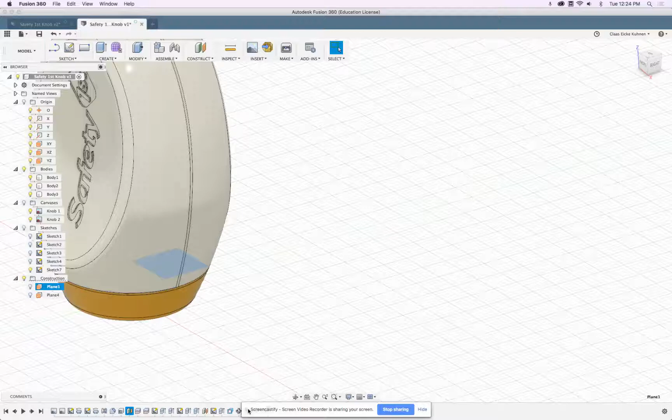Let's revisit the way we designed our individual parts. What I'd like to improve on this design is, while it's very good for quickly 3D printing and prototyping, and these parts do nicely interact with each other, I'd like to have a system where the two white parts can be better snapped together and the yellow part doesn't pop out.

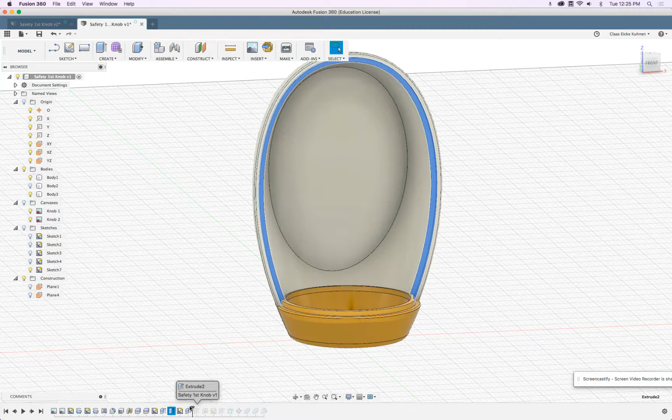So I would have to go back to kind of like the space. So, like there, this is good, that's fine. But what we did here, adding this lip and then cutting this part into it, I really do not want anymore. So I can delete this.

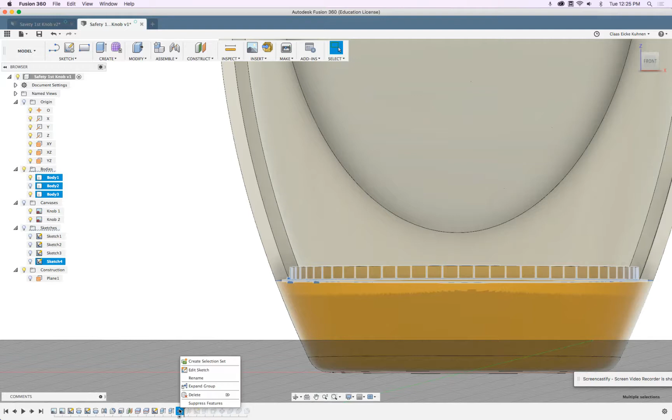Or I could, for example, group this into a group, and then suppress this group. Suppress means the functions aren't really active currently, and the rest of the design here should more or less continue being executed, as you can see. Good, so we go back to here.

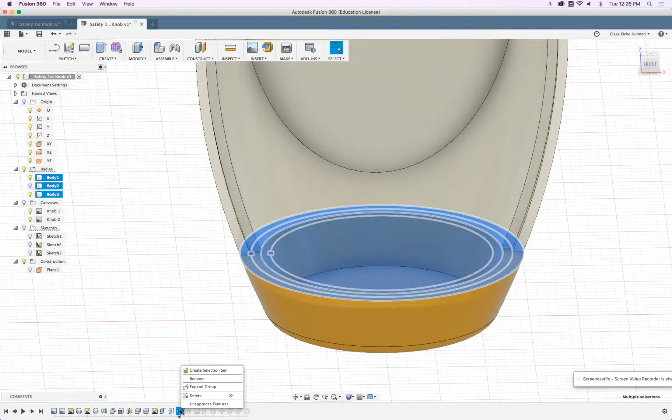Because I'm going to completely rebuild this, I will also simply delete this, and then delete the group and expand. No, I don't want to delete the group and the content. Very good.

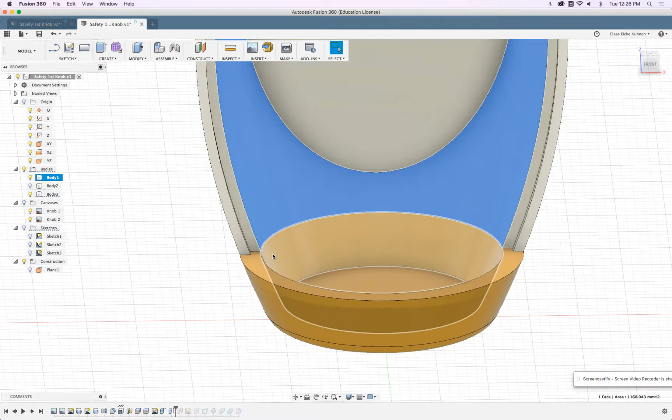So, essentially on the surface there, I need to have something that sits inside and functions kind of like a block. So how can we do this? This is actually pretty simple.

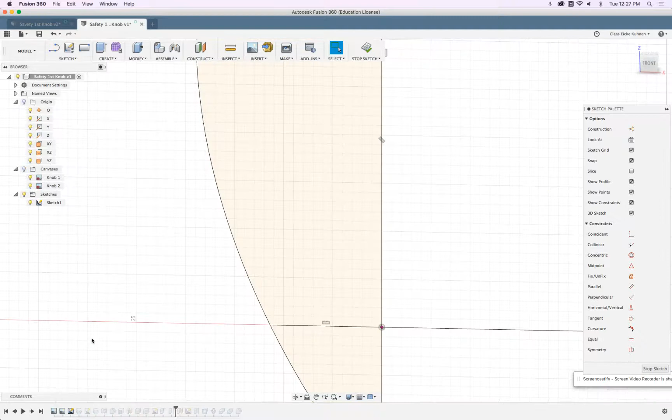So we did an offset of 2 millimeters, keep that in mind. I can, for example, go back here to my sketch, the first one, press O, and say offset 2 millimeters. Click stop. Let's show that sketch, and there you see that's plus minus where it is.

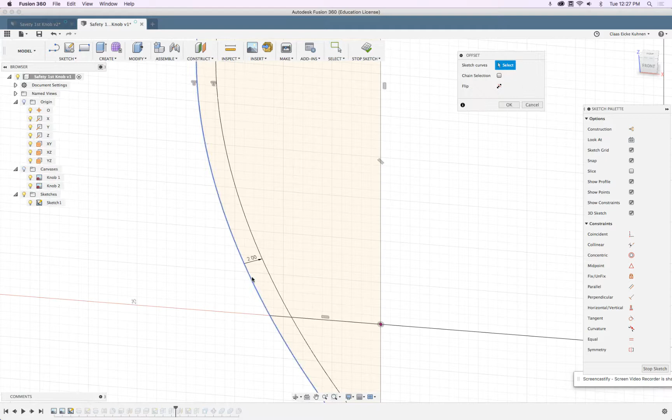Very good. So let's go back to that initial sketch. We do another offset, let's say 4 millimeters. And then here I will draw a horizontal line, and that line should be set to be horizontally constrained.

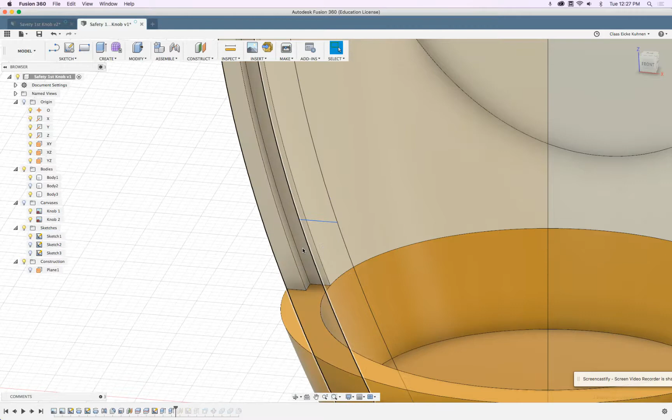Okay, very nice. Can we slide this one down? I just dragged it down, or with the M key. Yeah, sometimes it works, so I might have to redraw it by hand. The reason why I did this is I have now this profile. I'll turn all this off there.

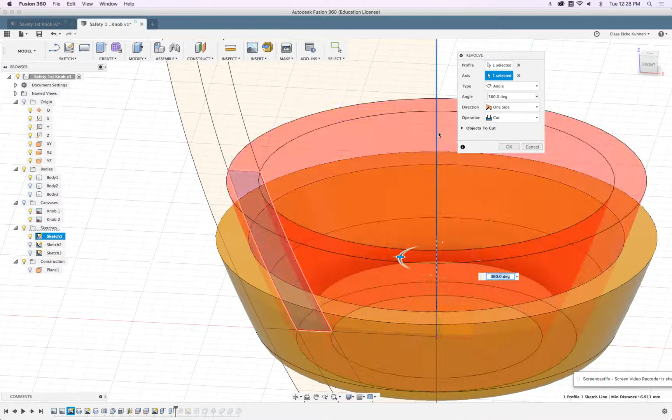Very nice. That profile, I do another revolve. So that profile along this axis, not cut, but join please. There, and see that's still hollow. But I have now kind of like this angle, and my sides perfectly fit over it, so the yellow part can't snap out anymore.

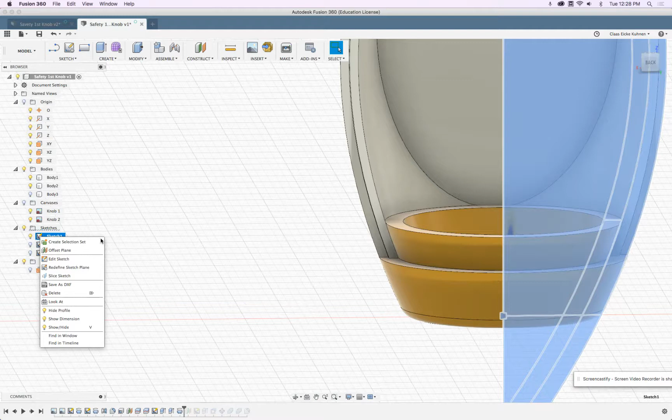Now for 3D printing, we don't want to waste too much material. So our question is, can we maybe bring this down a little bit? Yeah, that seems okay. What's the distance from here to there? 2 millimeters. Yeah, so we'll be fine.

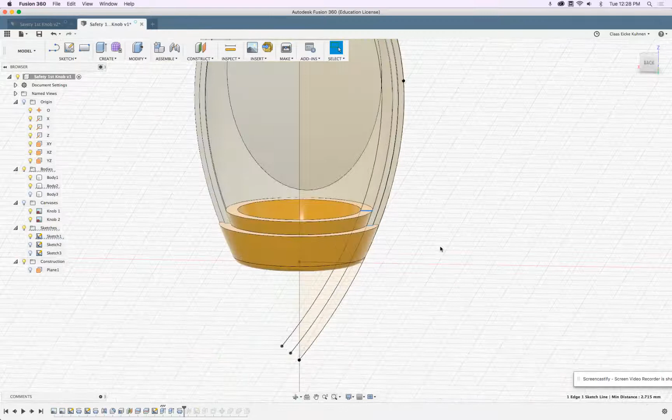Very good, okay, so that solved problem 1. Problem 2, I would like to have a better key here. So a key we can very easily build either out of a circular or a rectangular cross section. It's kind of like 2 tubes that meet each other, but one tube has a pin that goes into the other tube.

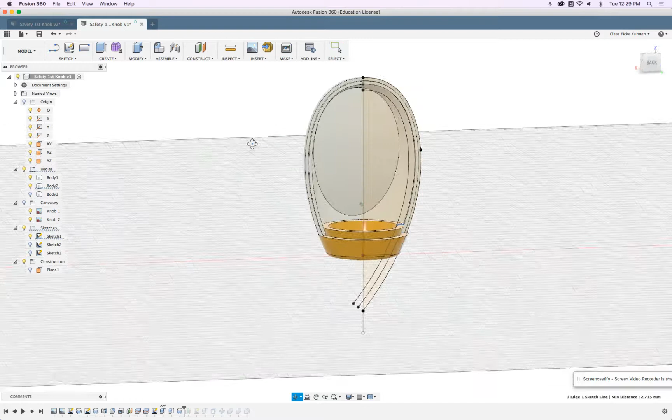To build this, we can put the same into this sketch too. Now we're 3D printing stuff, that means we might have to build things a little bit bigger compared to injection molded manufactured parts. And we have one here. The things don't really rotate, so we can just get away with just one key.

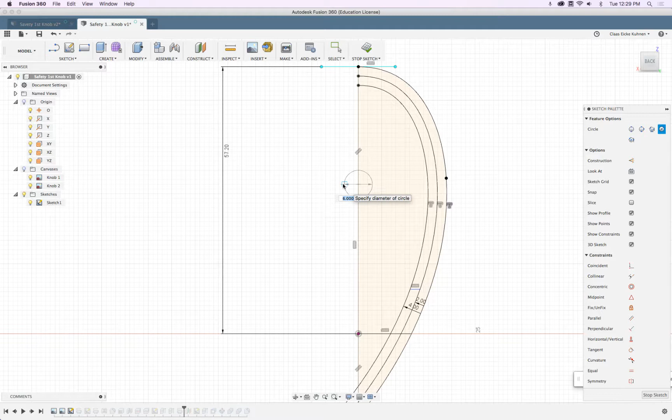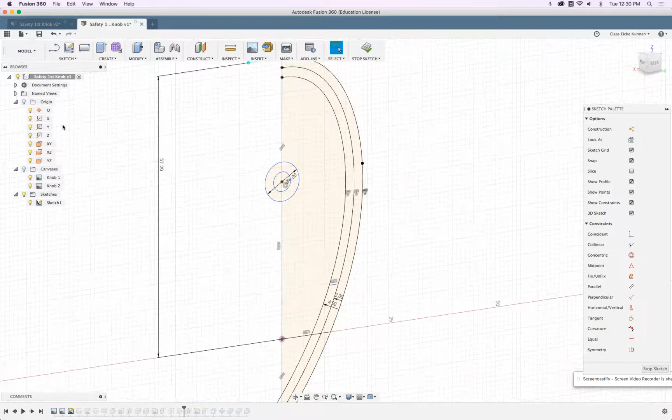The first key I would like to have 4mm for the pin, and then maybe 6mm. So that's actually 1mm, let's make this 8mm, so we have another 2mm for material thickness. Okay, very good, so the next step is actually super easy.

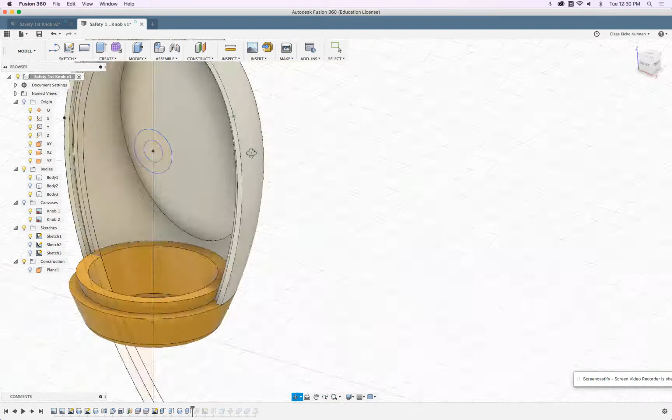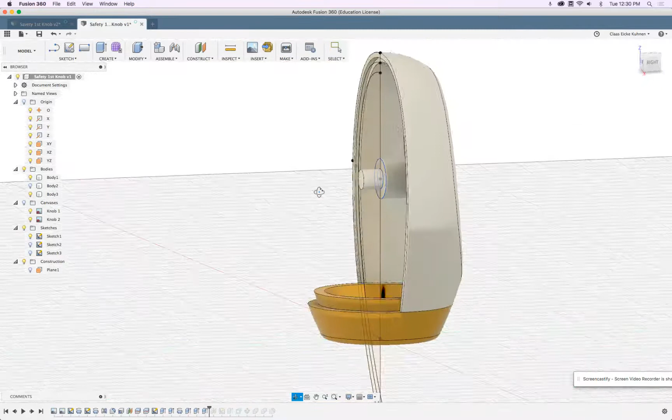So here, oh wait, actually this we take out, and then we extrude distance to that one, meet on it there. Very nice. And then here we do kind of like the whole thing this way, meet on that one. That's unfortunately solid, but we will core this one out via the 3D printing. And then this we maybe extend -4, so we have a nice key. Very good, and that basically is it.

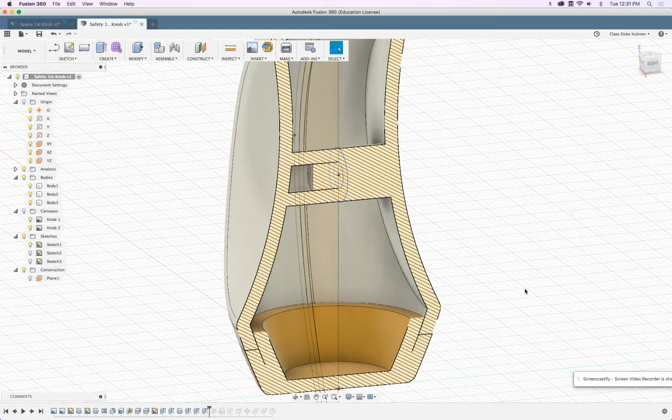Let's do a last inspection on this plane. Oh, and there you can see where the key fits in there. And that, for example, is a pretty secure lock. Wow, interesting, what's going on there?

So I have this black line there. Is there a gap? Whoa, there is a gap. Okay, so holy moly, how do we fix this? That is not acceptable. So let's go back to here.

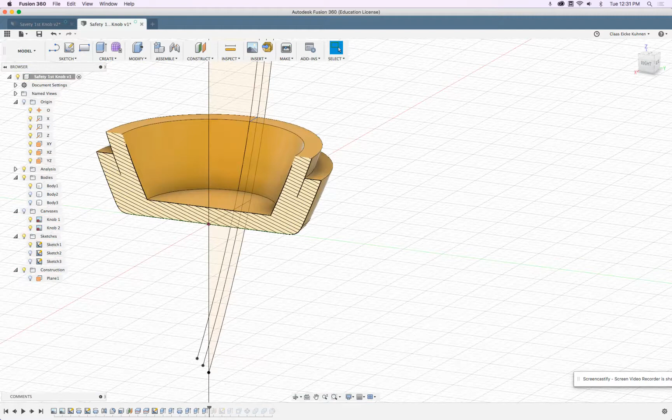This is kind of like the sketch we created. Interesting. So let's make this one 1.8, we make this a little bit smaller.

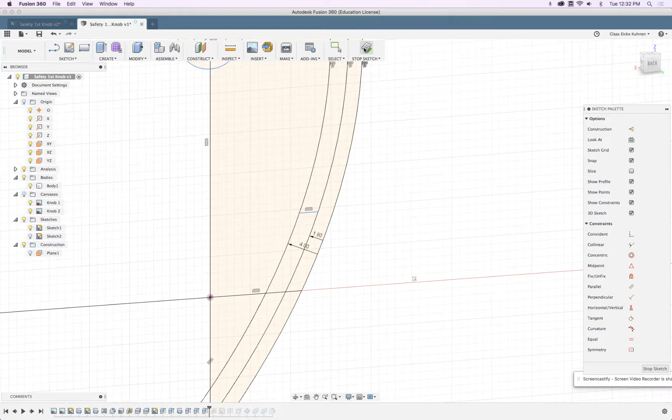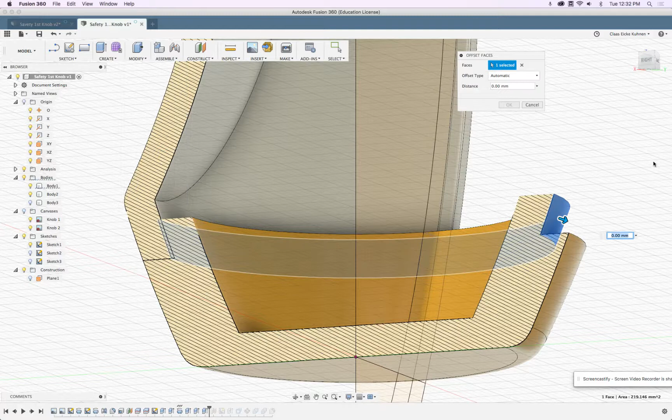Which will result in the issue of this one intersecting, you can see that. Now we extended it by 0.2mm. If we now go to press and pull and select this and then type in -0.2, we should shrink this one back. Yeah, there we did it.

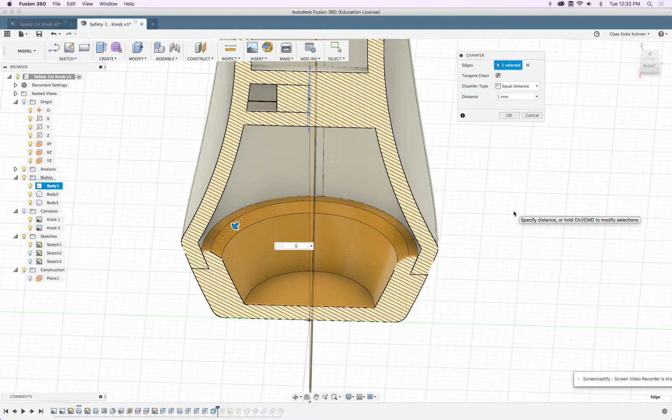Okay, now we see everything lines up. Awesome. If we want to save a little bit of material, we could also go ahead with a chamfer and say 1mm material chamfer there. So that's good. And we could even change this at an angle so it's not solidly thick, but that's fine.

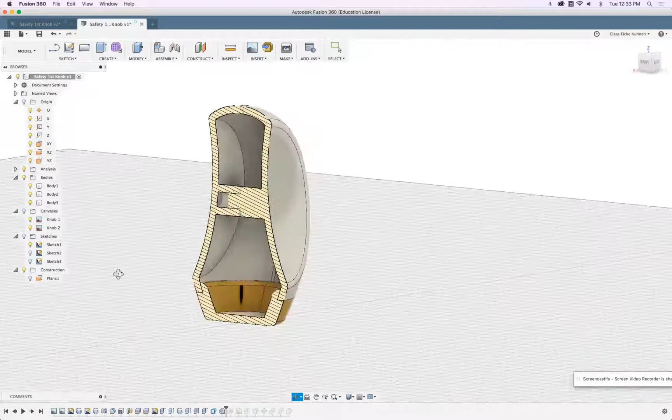You guys are at the beginning level, we're not really concerned much about material usage right now, just learning how to do our basic interlocking element. And I would say that's it.

Now with all that stuff done, we can go, for example, to the end. And there we are. Looks pretty awesome. Cool. Peace out.